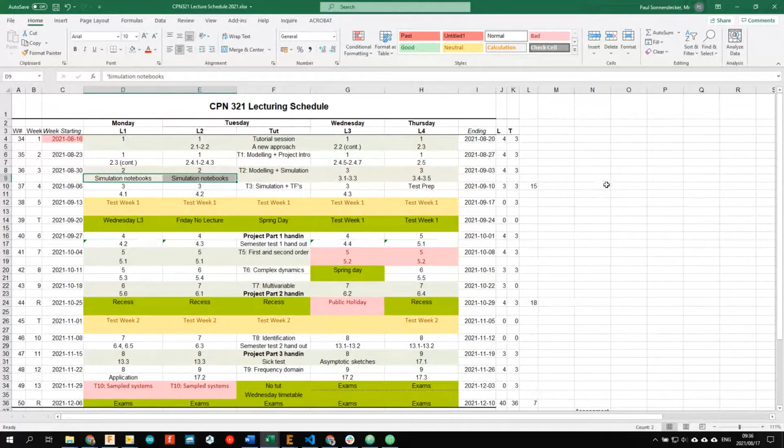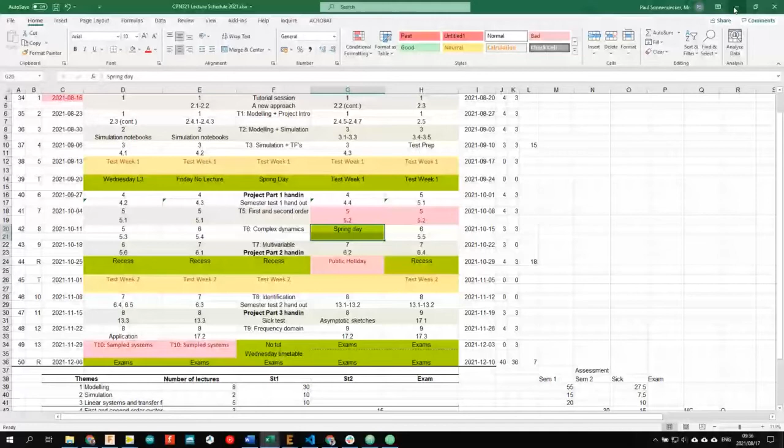Later on in the semester, you'll also see that things like Spring Day and public holidays are noted. Recess, I think this has been updated, but I'll indicate that later on when there's more information. I haven't updated everything yet, so it'll be right soon enough. Recess is only 3 days. Yeah, I already started crying when I saw that for the first time.

In any case, Seborg Chapter 1. I uploaded Chapter 1 and Chapter 2 under ClickUp additional material, ClickUp study material, please have a look at that. If you don't have the textbook yet, please get the textbook as soon as possible. I'm not going to upload everything onto ClickUp, that would be an infringement of copyright law.

So we start off, process. What does that mean? A process is a conversion of feed material to products using chemical and or physical operations. The word in our kind of industry refers to both the verb and the noun. Please don't stone me if my English is not perfect. I think it's a noun, not really 100% sure, I'm not English.

I'm Afrikaans speaking, but in any case, let's say it's a noun. The one refers to the actual physical processing, so the work we are doing. We process food to make it sloppy stuff that you can drink, or we refer to a process as the physical equipment standing in front of you that does that processing of your food, so the blender or the food processor. And that is pretty much what we are dealing with in the entire.

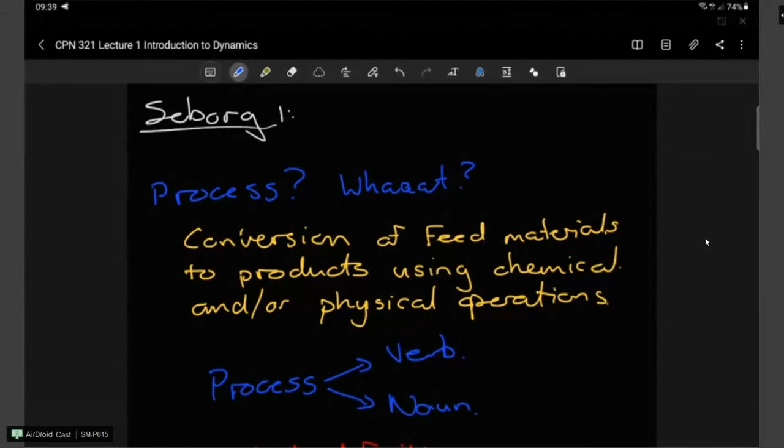Now that we know what a process is, please read through chapter 1. You'll notice what I'm referring to in these short notes I made. You don't have to understand everything, just the introduction to what we need to know about dynamics and processes. That would be section 1.1, a little bit of 1.2, and that's more or less it.

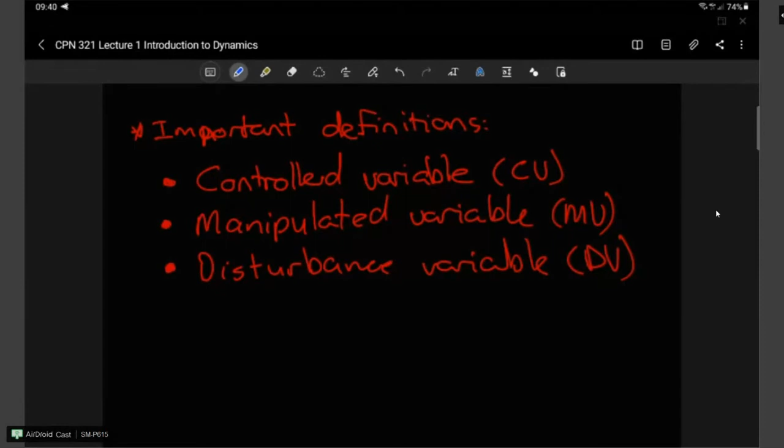Next, we have some important definitions we must understand, at least for the jargon we'll use this semester. All processes that we control have some form of a controlled variable - that's typically what we want to keep constant, to have a set point so that we have a profitable or exact quality product, final item, or stream that we want to control. To do so, we need to manipulate something that can accommodate disturbances or changes in that process - we call that our manipulated variable. Finally, all other variables that affect the process but cannot be manipulated, those we call disturbance variables.

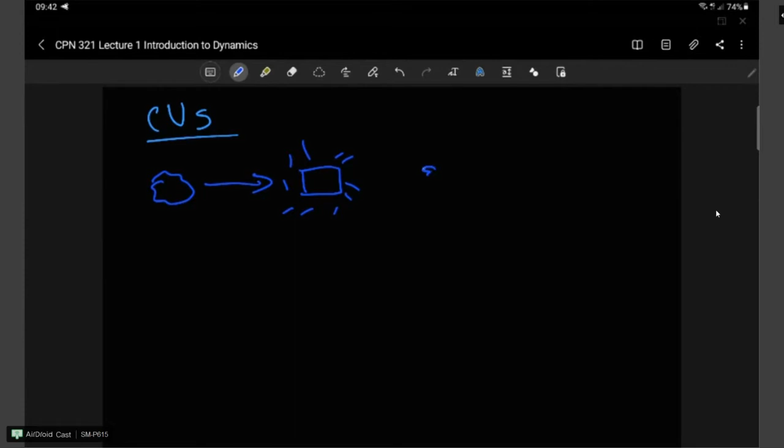As chemical engineers, we take crappy raw material and process it into something refined and valuable, so we can get a lot of dollars for that. Most of the time, except if you're an environmental engineer, you want to make money from whatever you're processing or doing.

In order to make money, we need some form of quality for that product. If we want a rectangular box, it can't look poorly made - that's a poor quality product. We want a product that's on spec: always the right dimensions, shape, and form. To do so, we need to control that at a specific set point - the position or value associated with the final specification we want.

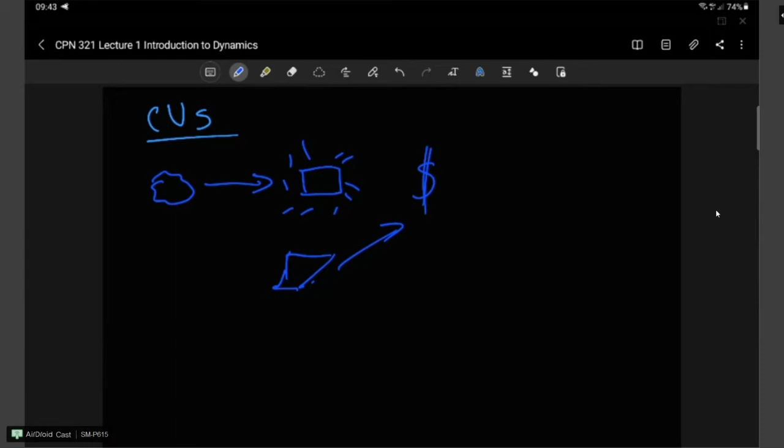Sometimes our controlled variables aren't necessary for making money or ensuring product quality, but also to ensure the safety of the plant and equipment - not only the equipment, but the personnel and human or animal inhabitants in surrounding areas - so we don't have an environmental disaster or loss of life around our processing plant or factory.

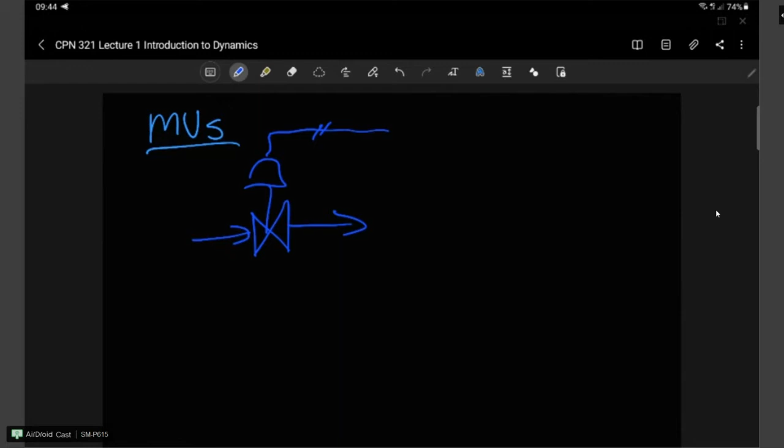Then we have our manipulated variables. For most chemical processes, we manipulate flows - we manipulate a valve, which consequently manipulates the flow through a pipeline to increase or decrease the flow rate. You'll see this a lot this semester and next, where we have something that looks like a control valve, with lines drawn to it indicating we send a signal to make it open or close, manipulating that flow.

These flows we manipulate are usually utilities - steam, cooling water, airflow to something. Every now and then we might be manipulating the speed of a motor for a pump, or the number of rotations for something like a stepper motor, to ensure some linear actuation occurs, or to drive something left or right.

If we think about everyday things we know well, like automobiles, there are a number of controlled, manipulated, and disturbance variables associated with that. A manipulated variable would be your steering wheel or brake pedal, where you manipulate a specific variable in order to control some output - the speed we're going for, the direction we're going in.

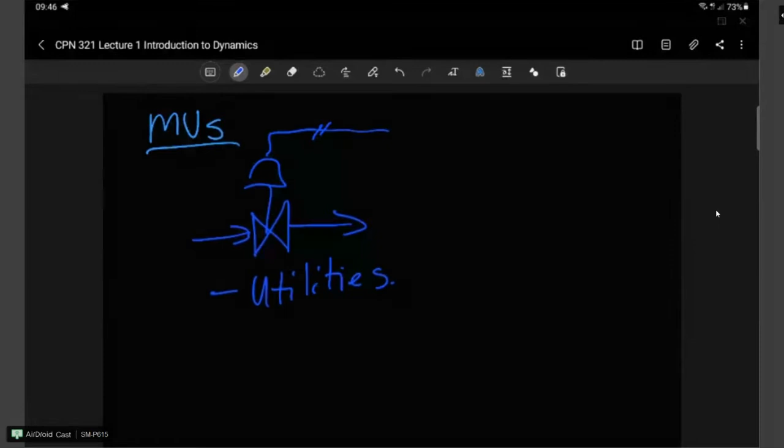Consequently, if I mention the accelerator pedal and brake pedal, as well as steering, then we have a multiple input, multiple output system, because we now manipulate two variables and end up controlling two variables: speed and direction. But more on that in the coming module, CPB.

Disturbance variables are all the things that affect our process, but we cannot manipulate those. Sometimes you cannot manipulate a specific process stream because it comes from an upstream process, and that process uses that stream as a controlled variable. If you now go and manipulate the downstream, you are changing their flow rates, their quality, or something like that, and you are causing major upsets and disturbances in the upstream process, and therefore we can't manipulate that stream, and hence it is a disturbance variable.

At some point in time, that upstream process controlled variable will deviate due to some other disturbance variables that act upon that process. That controlled variable deviating from the set point will now cause a disturbance in your process.

Hopefully you have some form of an idea what controlled, manipulated, and disturbance variables are. We aren't too worried about what these mean now, but from time to time you will come across these words, and you'll need to know what they are so that we can understand the questions that you are faced with.

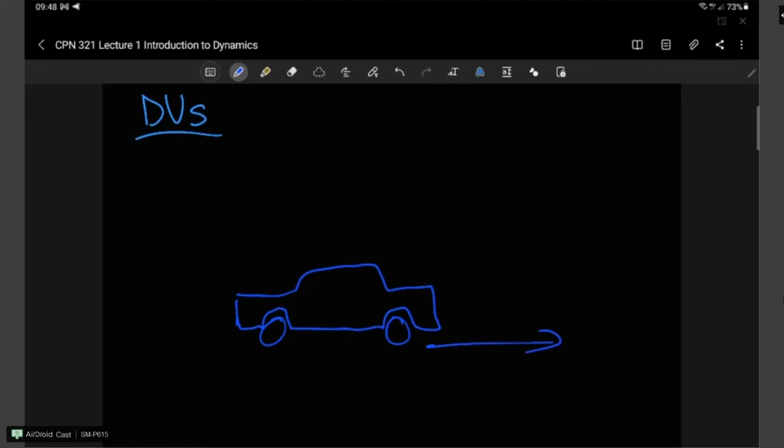Someone jumps in front of you and you need to deviate from your actual course. You want to go straight, but if you do that, you are going to hit a person, and that is frowned upon, so you need to deviate. That person causes a disturbance in your required, or controlled, variable path - the direction you want to go into - and you must deviate from that. You have to go around the person so that you don't hit them, and that has caused a disturbance which you change your manipulated variable for, so that you avoid the person and get back onto the correct path that you want to go to.

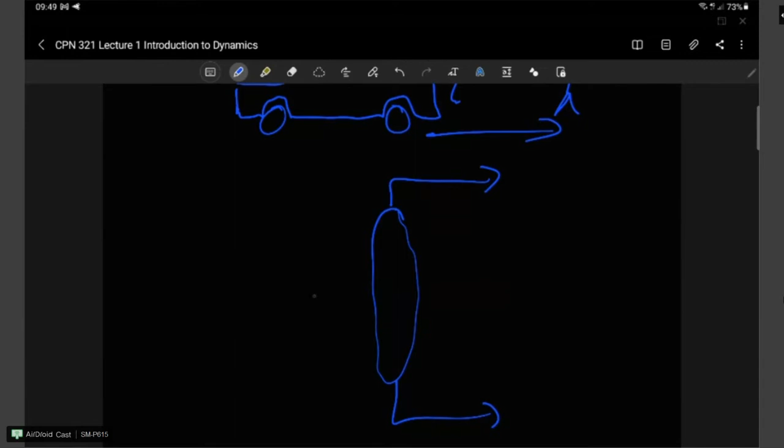In terms of a chemical process, let's say we have this distillation column. This is our primary focus. It's a simplified drawing, so don't stone me for this, but this stream that I drew here comes from a plant that your colleague works on, which is some form of a reactor system, and he is responsible for controlling that. That's the feed to your plant.

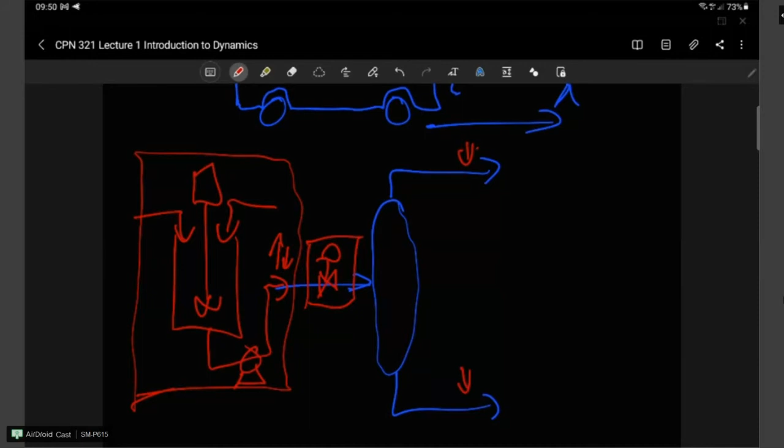You may not change this process, and whenever his inputs change, there will be some up or down deviation in his output, which is an input to your system. You may not put a control valve there because it would cause upsets in his plant. So you cannot manipulate this stream, and you must assume it as a disturbance variable, which will affect either or both of these streams after the distillation process has occurred. So that would be a disturbance variable in this simplified sketch.

It is not necessarily totally internal. Remember, we are referring to a lot of simplified processes and sketches and so forth. You will obviously not be...

No, not necessarily. It's only predictable if you measure it. If you don't measure it, you don't know what's going to happen. Not all disturbances are measurable. Some are measurable, some aren't measurable.

Whenever you get the feeling, or whenever you are faced with the question of 'list some disturbance variables', and we'll discover or handle some of these later on in the TUT today, do not always be tempted to refer to ambient conditions as a disturbance variable, by the way. They rarely affect the process to such an extent that they are real, important disturbance variables to a process.

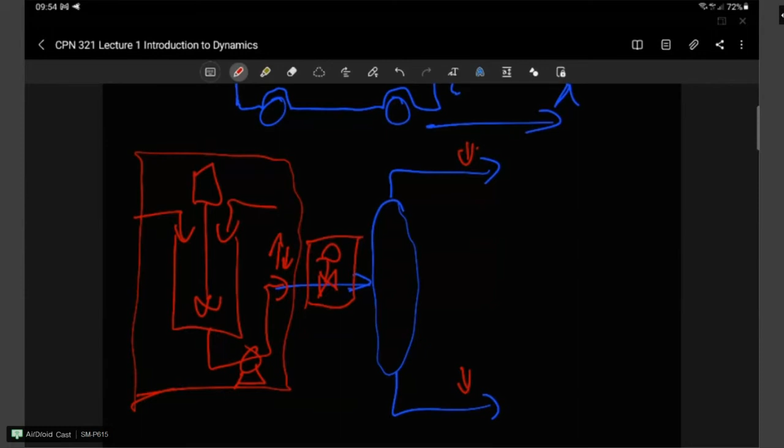All right, moving along.

You'll see this example in the textbook. We're going to refer to this example a number of times throughout the course, as well as CPB. It's the one the textbook uses, but if you consider a blending system like this, we have two streams coming in. In chapter 1, x2 is constant at 1, meaning it is complete whatever x is.

For us to be able to determine the dynamics and eventually the control, we have to determine what the variables are, what we can assume to be constant, and what assumptions we need to make in order to derive this dynamic model of the system.

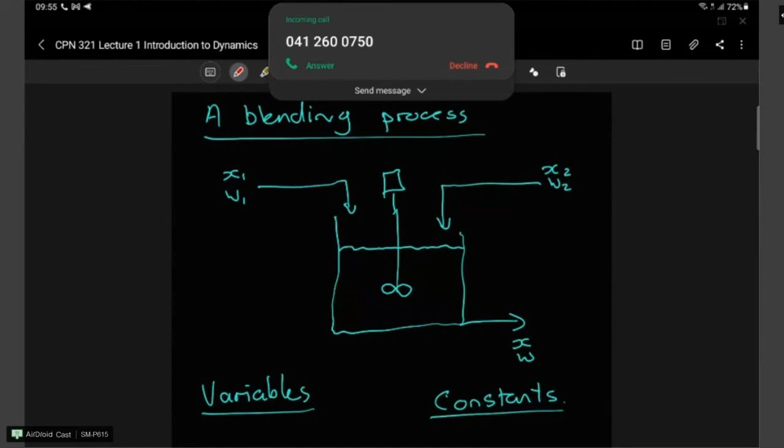We need to know what assumptions we can make such that we're able to determine this actual model of the system.

Those assumptions are extremely important, because if you make the wrong assumptions, our model is not valid, and there will eventually be some fundamental flaw in the model we develop, and all our simulations and so forth will be incorrect.

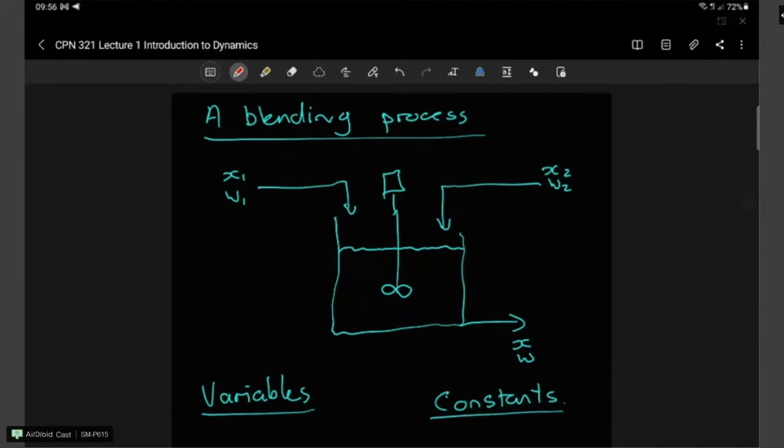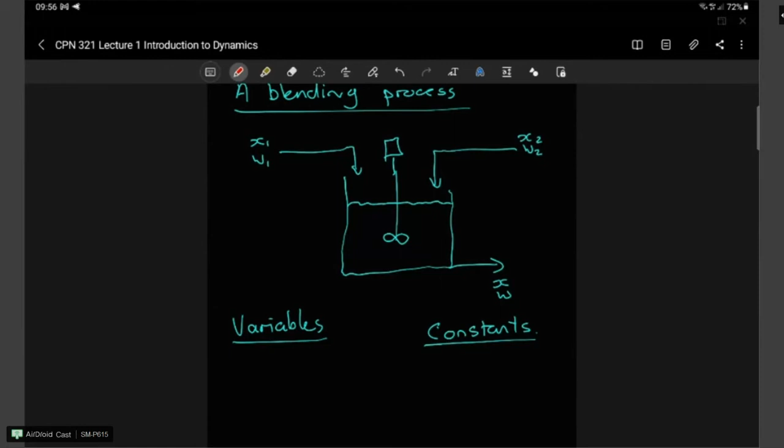Because we're going to refer to this process in section 2.2 tomorrow, I'm not going to do it in full, but let's just reiterate the controlled variable, manipulated variable, and disturbance variables.

Let's say x2 equals 1 in this instance. Regardless of whether it's 1 or not, what do you think are the controlled variables in this blending system? Name two. What do you think we would like to control?

Alex, that is correct. Marinique, unfortunately you're incorrect. Jordan, if you answer with a question mark like that in a semester test, that would be incorrect as well. Temperature is not even indicated here - we're purely blending some stuff. Jordan, still incorrect.

You want to control two things: the composition X, and the flow rate W going out of the tank. We have a tank with some capacity for fluctuation, so the volume most probably can change every now and then since it's an open tank as indicated in the diagram. So the two most likely things we want to control are the composition going out, as well as the flow rate of that product stream.

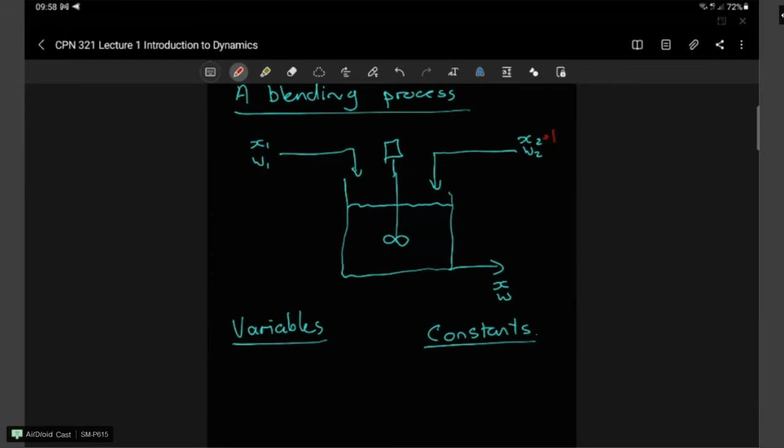We do that by manipulating one or both of our inputs, depending on what we can manipulate and what we can't manipulate or measure. But in any case, if this is a completely unspecified problem, then obviously all these inputs and outputs are variables.

None of them would be constant, but then there are too many degrees of freedom. If we want to do that, we have to decide which need to be manipulated variables so we can specify them - otherwise we won't have enough equations to solve it eventually.

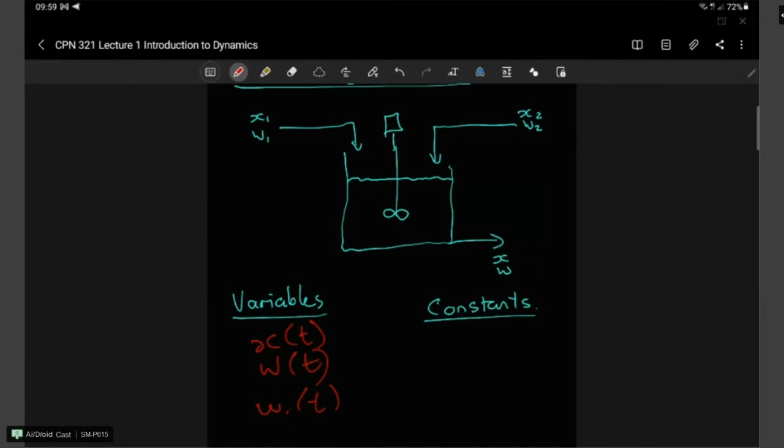In any event, this is basically what we do in dynamics this semester. We take a process and determine what our variables are. We're going to jot them down - this is going to change, that's going to change, let's say W1 is going to be a variable. And we're going to say that maybe X2 is a constant, because that equals 1 and it will always equal 1.

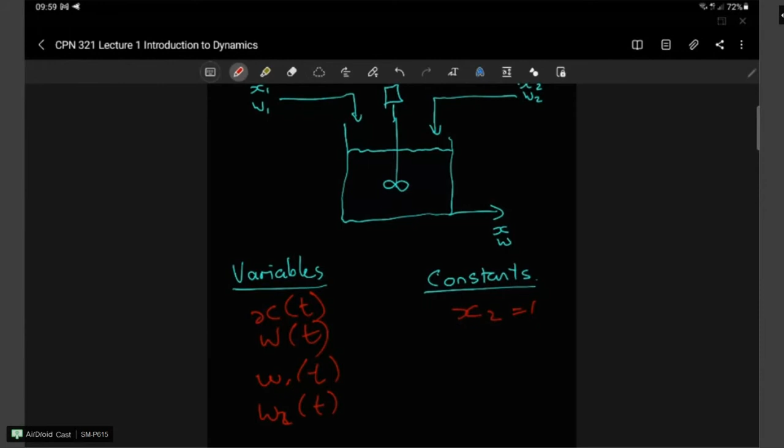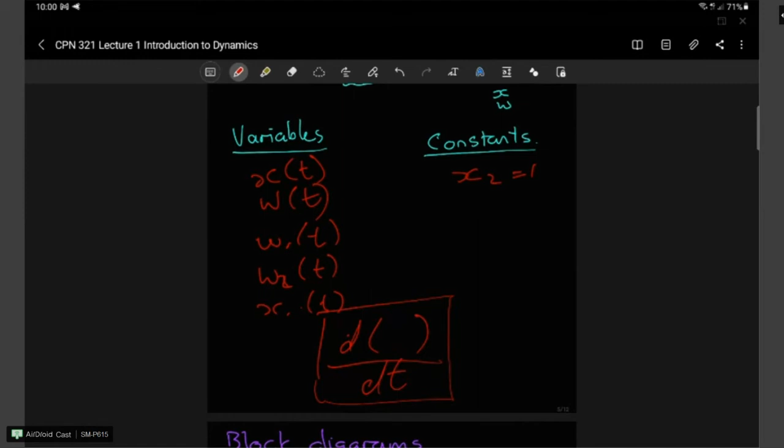W2 is going to be a variable, and I'm just making these up as I go along. Not really, but in any case. And maybe X1 changes, just for the hell of it. So from a dynamic point of view, we are eventually going to have to write down some form of a differential equation so that we can fully define that problem, and we'll get to that shortly. I like these cliffhangers.

Anywho, just something else that you need to know about block diagrams. From time to time, this will be thrown on your path, even in CPN. It's a convenient way of conveying information, but in any case, block diagrams typically include all our streams, our variables, and in this case, what is presented here is...

A feedback control loop where we have some set point, which is compared to our measured variable, our measurement indicated there. That might be a temperature, it might be a flow rate, it might be a pressure, it might be something else. And that change, or the difference between the two, we denote as the error. That error goes through a controller, which is a computerized or software system, or could be actually mechanical, but more or less nowadays everything is pretty much computerized.

That controller sends out some form of electronic or pneumatic signal to a valve or final control element, which manipulates some form of input to our process, so that we eventually mitigate that change, which is caused by either a disturbance or a set point change.

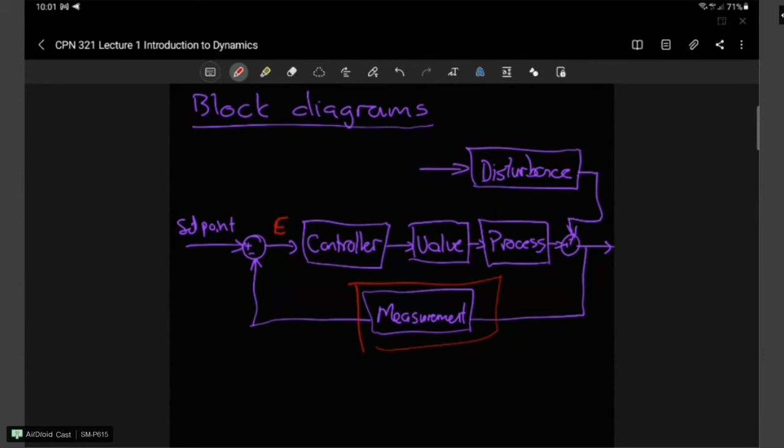So if I draw this, we have a control valve there, and we want to control the level. So we have a level transmitter, level controller, that's connected to some inputs. Now you're manipulating an output in order to control a different variable. So it's not necessarily always an input that you are manipulating. Just be aware of that. But more on that in CPB, so do not be too concerned right now.

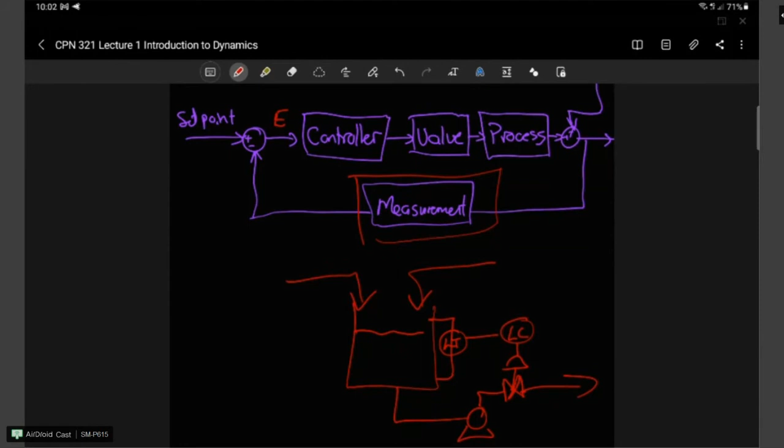Okay, so that is in a nutshell what you need to know from chapter 1. Please do read through that and ensure that you understand or get some background on controlled, manipulated, and disturbance variables. And for interest's sake, read through the rest of that chapter. It's not too long, and look at the examples that they provide there for different processes and so forth.

Then chapter 2, so our introduction to theoretical models of chemical processes. Obviously, we are chemical engineers, so we are mostly going to refer to chemical processes. And just after I said that, you will realize later this afternoon that that is not necessarily the case. But that's for you to find out a little later.

Okay, so why do we need to know or understand the dynamics of a system? And if you think that this is the final answer, then unfortunately you're incorrect. We do assume steady state for pretty much all the things we try and do because we want to make it as easy as possible. But if we always do that, and if we always work at steady state, then we will never actually need this module, CPN 321, and we'll never be required to do CPB 410, because we will have a system that...

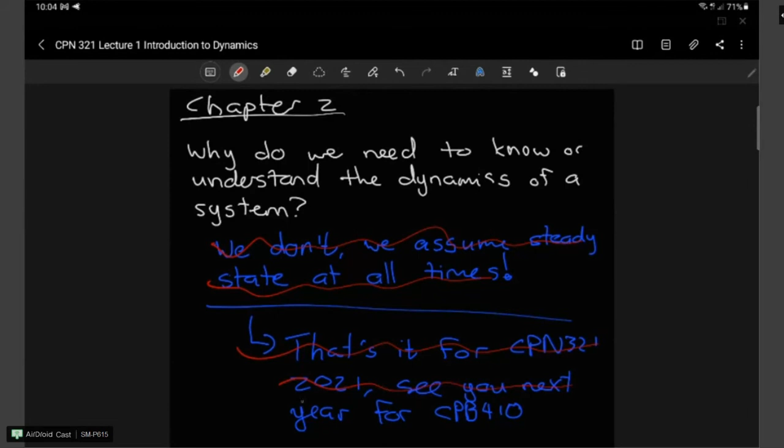Is at steady state. It's never going to change. So that is unfortunately incorrect, and we need to know the dynamics of a system for the following number of reasons. So firstly, we need to understand...

That is a good answer. Good answer, Ivandre. Quickly read it, not 100% correct, but on the right track.

So, in order for us to understand the process, we need to know how its dynamics work. For a simple example, let's say you want to know how hot your stove plate is. Obviously, if you have no idea what the dynamics of that is, you're going to burn your fingers, and you're going to burn them a number of times because you don't understand what's going on.

We know if we touch that hot stove plate, then there's some heat transfer going through the stove material, so that plate material, the metal surface, and that transfer is going into your fingers, so it's going through your skin. And if you keep your finger there for way too long, then you're going to burn it. So in order for us to understand that process, we need to have an idea of how quickly it's going to happen. We have some form of an idea how hot that stove plate is. It's way hotter than our finger, or it can potentially be way hotter than the finger, so we need to be relatively fast in touching and removing it if you want to determine how hot that is.

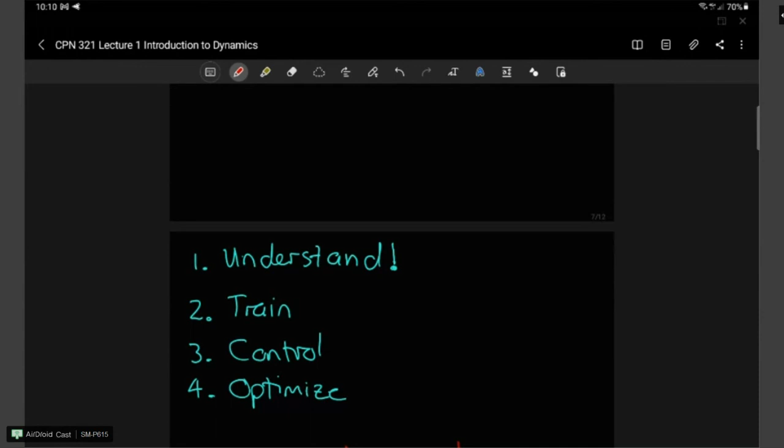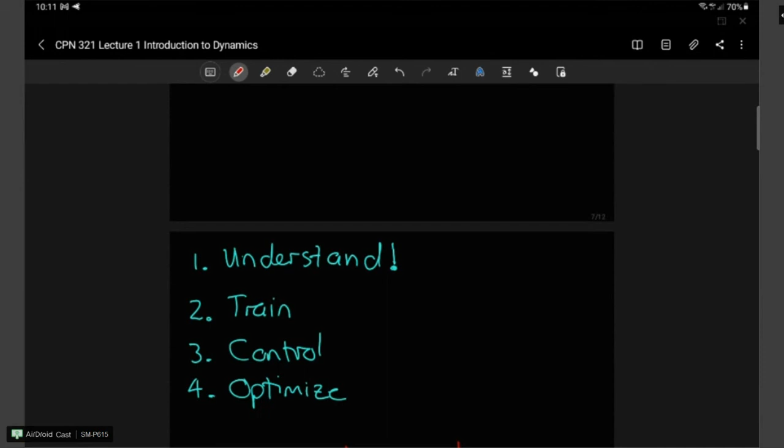Let's say you save 1 cent on a Coca-Cola can. Just imagine how much money you've saved that company over a number of years, where they produce 1 million or 2 million of those cans per day. It's eventually a lot of money, and that is purely due to optimization. To enable optimization from a mathematical point of view, you obviously need the model.

Right. So just so that we all know what this actually means.

If we look at the definition of dynamic, it's a process or system characterized by constant change, activity, or progress. And when we add that 's', so not dynamic but dynamics, dynamics is the study of that change, how it occurs and how quickly it occurs.

Now, when we refer to dynamics as in process dynamics, it's important to mention that we need to know what the steady state, our nominal conditions, are. It's not only about the rate of change, even though the word refers to that, but it's also important to know where it's going to end, because a lot of our modeling and conditions are based on the steady state conditions, where it usually should be operated at.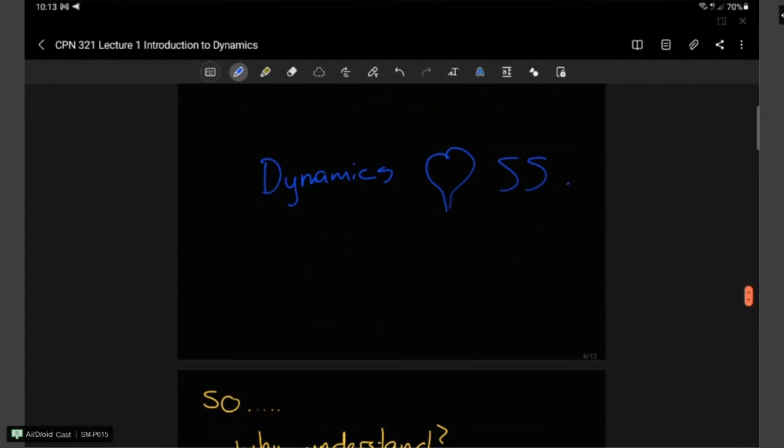Please do not think that steady state is not important. We kind of have to do it like... these two need to go together for us to understand, or to enable us to build our models properly.

I did go through this in a decent amount of detail, but I haven't started this. So how do we get to understanding or knowing the dynamics? We mentioned models. Models aren't those beautiful people walking on platforms showcasing the latest fashion. They're also models, but they are not as clever usually as the models that we are referring to.

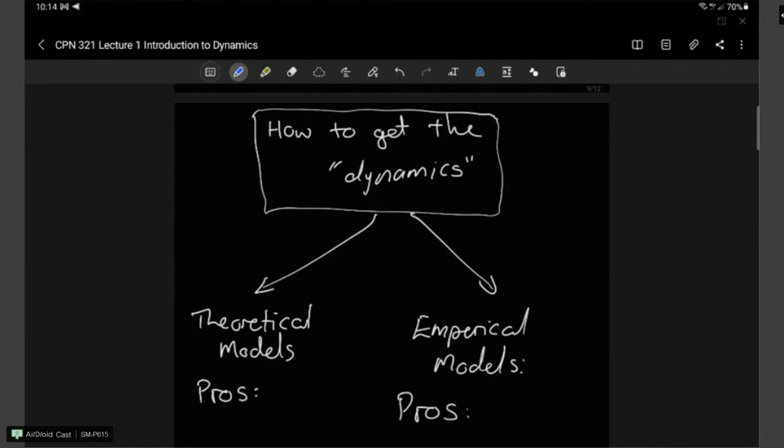Firstly, we have theoretical models. We all know these, you've dealt with them. These models are governed by our conservation laws, so conservation of mass, conservation of energy, component balances, which is a subsection of conservation of mass. So the stuff that physically determines or governs everything around us, pretty much.

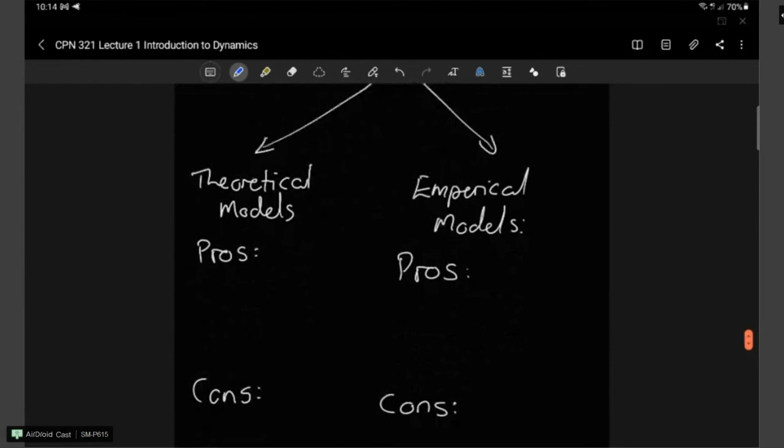But there are always a number of pros and cons associated with these models. In order for us to derive a theoretical model, if we take the blending system, which is just a tank with some inflows and one outflow, that is extremely easy. Given that we make correct assumptions, something like a continuously stirred tank reactor, or assume perfect mixing, then it makes it a lot easier.

But not all processes are blending tanks. A lot of them are extremely advanced and complex, and therefore deriving these theoretical models does get extremely difficult, and it is extremely time consuming. And one bad assumption can cause that model eventually to fail or to deviate from the actual scenario.

Another aspect about theoretical models is the non-linearity of those. We'll trade on this in study theme 3 when we discuss non-linearity in more detail. But basically what it means, as you'll see in study theme 3, we kind of want to work with linear models, and in doing so, we end up simplifying around a specific point in our system, let's say our normal operating conditions.

But if those operating conditions change, and they change substantially, then you end up at a point where you're so far away from the point of linearization that you see the effect of the nonlinear aspect of that physical, real process.

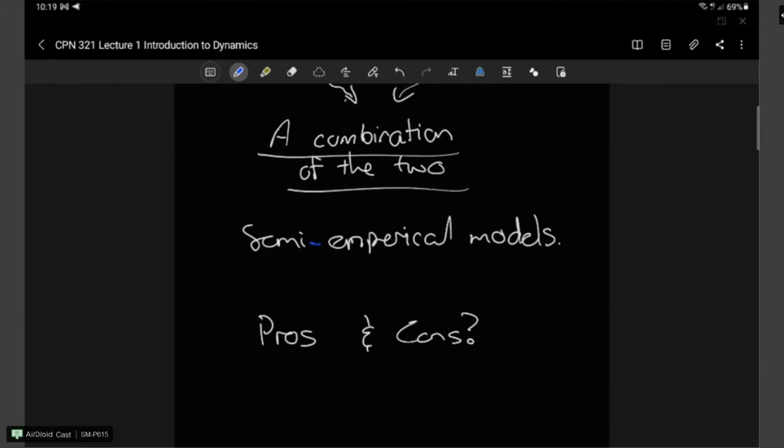Not 100% accurate always, but we as engineers like to believe that 5 to 10% inaccuracy is okay-ish.

It is way too late to start with this now, but we will continue with this blending system and derive our first dynamic model for this in tomorrow's lecture.